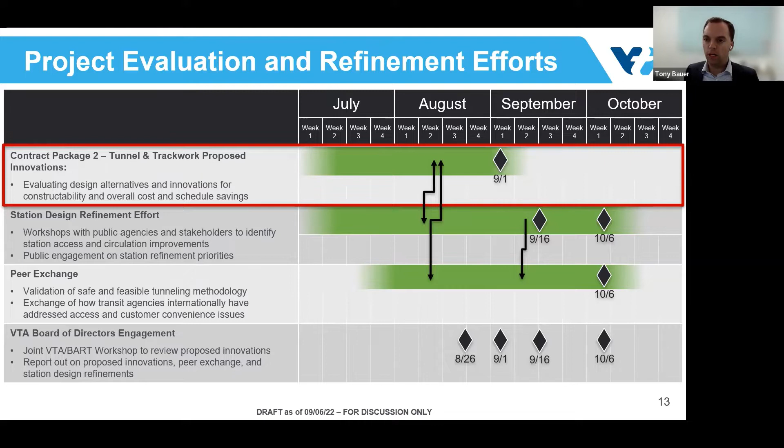We've also been providing input to the 2 parallel activities, the station design refinement effort and that peer exchange. And then on the last line there's just again summarizing the board of directors engagement that we've had over the last couple of weeks, and we will in the coming weeks.

Next slide, please. So as some of you may or may not know, the CP2 contract is being delivered with what we call a progressive design build delivery model. This is a pretty innovative way to deliver a construction transit project, but it involves engaging our contractor early in the process to solicit their input on the design of the overall project.

It's very important to get constructibility, cost, and schedule feedback from a contractor who's going to build the job early in the process to make a better project. One of the ways to do that, to get that early engagement, is through a progressive design build model.

That model starts by defining high-level requirements for the project and overall goals, and then allowing the contractor to come up with the design collaboratively with VTA, BART, and our stakeholders that will meet those project goals and requirements. As expected, when we collected proposals in December of last year from our 2 bidders...

Each of those proposals contained a number of really great ideas that we wanted to work with the contractor to further evaluate, and some have pretty significant impacts on the overall configuration of the project. As part of that board award that the board of directors authorized us in May, they directed us to study over the next 90 days these innovations that were included in the proposal jointly with the KST team.

That has led to the proposed innovation, which is the contractor proposing that we can actually increase the size of the tunnel by about 5 feet — a slight increase in the diameter of the tunnel.

But what that would allow us to do is locate the trains side by side completely from end to end of the underground alignment. So it would be consistent from the east portal all the way to the west portal, where the trains are relatively at this same location. And that would allow us at the underground stations to put a center platform in between the two trainways.

This standardization of the tunnel cross section allows us to more systematically construct the structures inside the tunnel, and we're actually able to build some of these structures as we're constructing the tunnel. So the tunnel is being bored ahead of us, and then several thousand feet behind where the tunnel is being constructed, the internal structures are being constructed. That allows us significant time savings and associated cost savings with that approach.

As you can also see, the center platform at these stations can be accessed from a mezzanine level, which you can sort of see towards the back of the rendering there. Passengers would come into this mezzanine level, which would be above the platform, and would come down stairs or elevators to the platform level.

It also gives us a lot of flexibility in how we can arrange the station entrance locations, and Peter's going to talk a little bit more about this. The mezzanine is very flexible, and where those station entrances are located is a lot more flexible than the previous design.

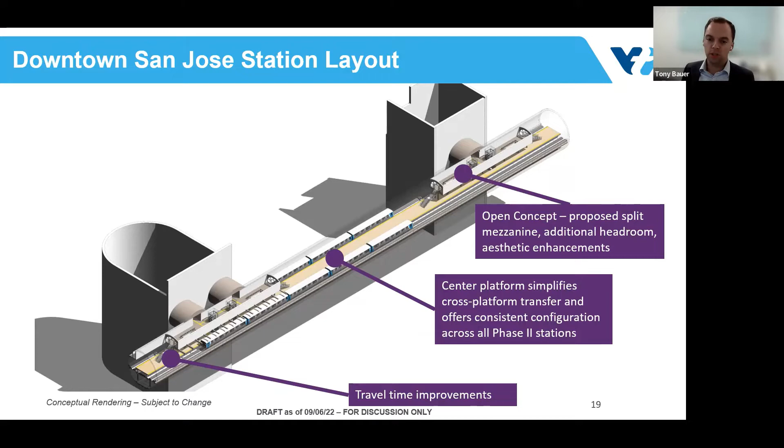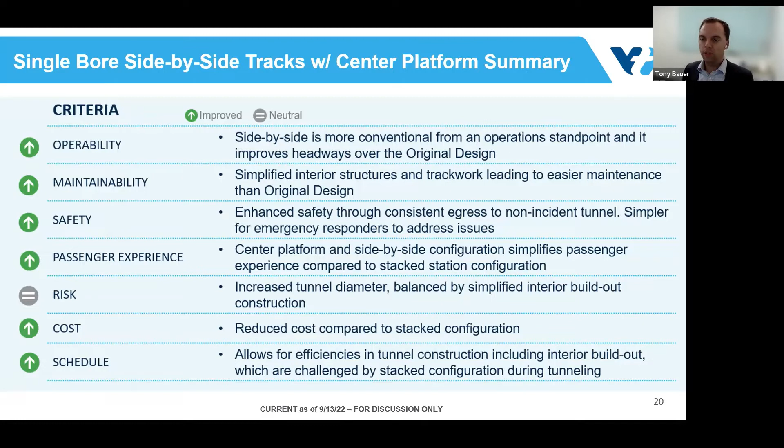I won't go through all of these, but we talked about the criteria we evaluated these innovations against, and here they're repeated. We see big improvements in all of those criteria: operability, safety, maintainability, and the cost and schedule benefits that we talked about earlier.

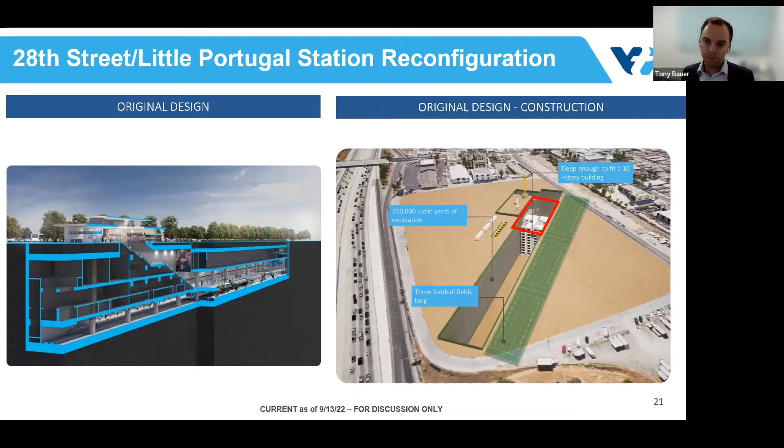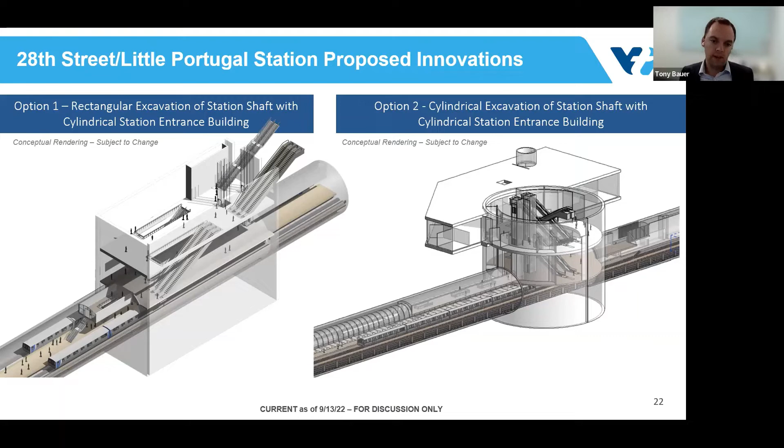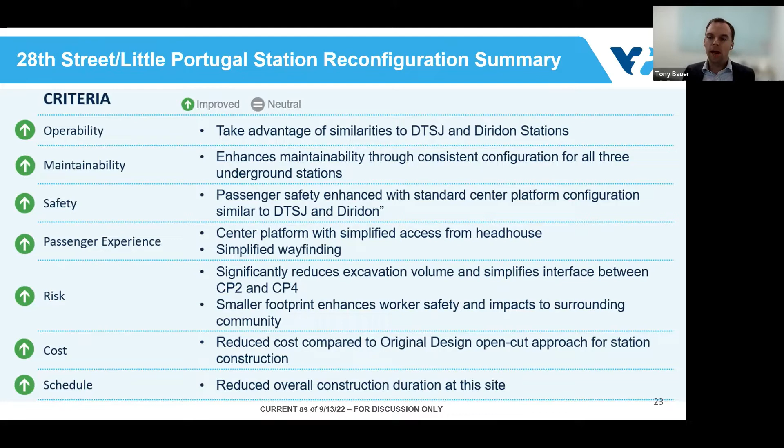Back to the criteria again, we see massive improvements in this innovation compared to the original design. Operability is improved, along with safety, maintainability, and significant improvements in construction impacts to the surrounding area because of the smaller excavation, plus improvements in cost and schedule.

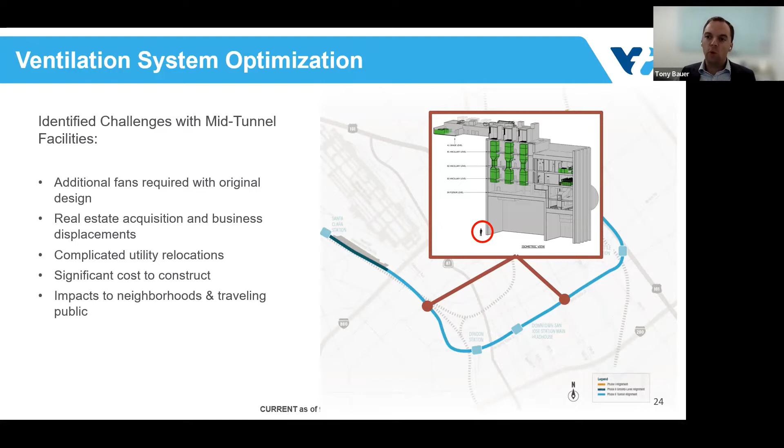If we can jump to the next slide, we can see visually what that looks like.

In the event of a fire, say a train fire, smoke would rise up to the top of the tunnel and then be pulled into these EVS stacks, as we're calling them. Essentially you can think of them as chimneys which go from the top of the tunnel to the bottom. The smoke would be pulled into those EVS stacks and then downwards into the bottom of the tunnel, where it would be taken to the nearest emergency ventilation shaft.

Because of the standardization of the cross-section from end to end, we have this continuous duct from end to end. This allows us a lot more flexibility in where we can locate the emergency ventilation equipment.

What's proposed in the innovation is, how can we look at moving the emergency ventilation equipment that was at these mid-tunnel facilities elsewhere, like at the station locations, which would allow us to eliminate the need for the mid-tunnel facilities in their entirety. We think we've come up with a solution for moving all of that equipment, and we feel we can avoid having to build these facilities, which will have cost benefits by not having to construct them.

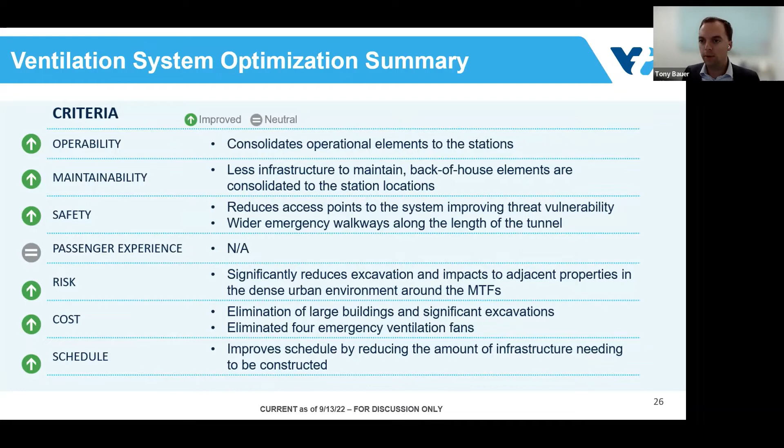In terms of timing, we have a busy couple of years ahead of us. We're moving into the final design phase of our project, and we're delivering the project in two phases. Phase one, or stage one, is essentially the final design phase, and stage two will be the heavy construction work. We are anticipating starting heavy construction in mid-2024 or so.

In between now and then, we have a lot of work to do in terms of design and getting approvals for the project. In order to meet our overall program schedule, we need to start certain construction activities earlier than the stage 2 date, where we'll kick off most of the construction.

These are for long lead items. One example is purchasing the tunnel boring machine, a large piece of construction equipment with a long lead time. It'll take between 18 and 24 months for the vendor to manufacture the machine, assemble it, test it, disassemble it, ship it to our site, and then reassemble it for testing. So we need to start that process early.

We are planning to go back to the VTA Board of Directors at the end of this year or early next year to ask for authorization to purchase the tunnel boring machine and some other early works. We also anticipate going back to the Board for other enabling works contracts, such as utility relocation, some building demolition, and other enabling works towards the end of 2023. So we'll have some construction activities happening in 23 and 24, with heavy construction starting in mid-24.

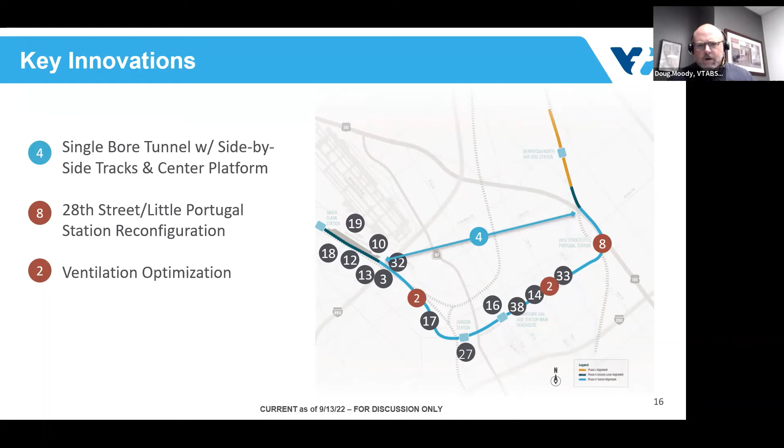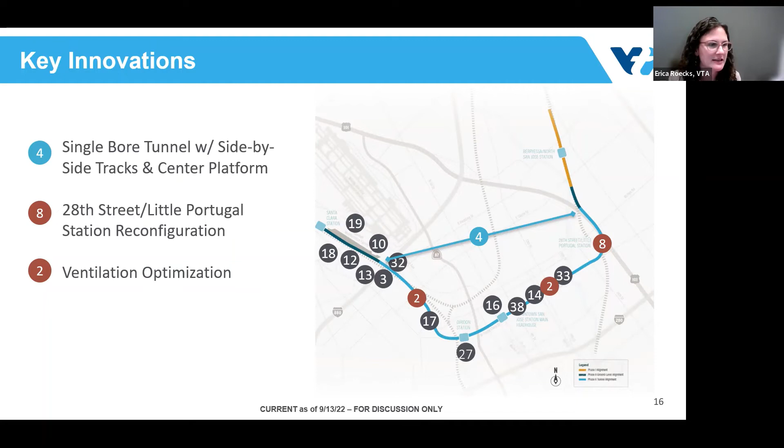Eric, I saw you come on camera. I was just going to mention that these are the proposed innovations, so they're not all guaranteed to happen yet. So while some of them may happen adjacent to their neighborhood, Jonathan, I just want to make sure that as you share with them, it's not that these are fully done and baked, that they're still proposed at this time. There's a process to go through, but it'll go through the EIR process and all that.

If they have effects. I had two other questions for just this section. What's the advantage of this wider tunnel now that we have side by side versus the original twin bore design, which gave a similar side by side configuration?

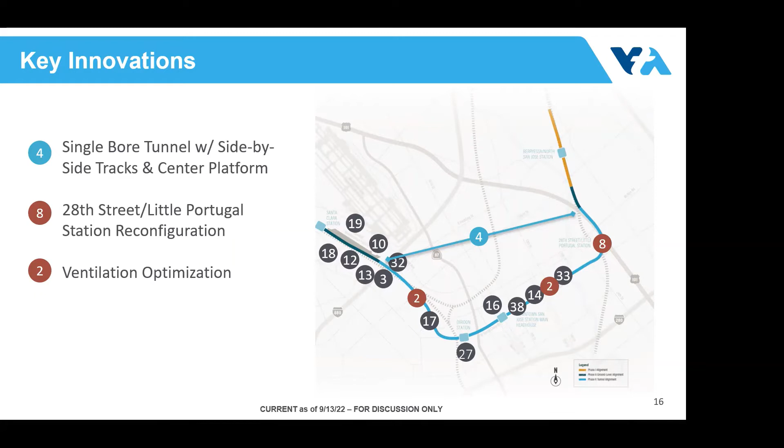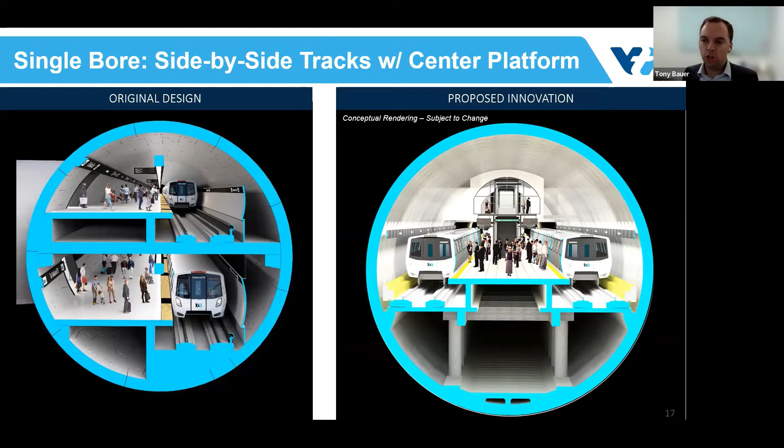So there are a number of benefits. The single bore benefit is still there compared to twin bore in terms of the amount of street disruption and utility relocations that would be required for twin bore. Also, if we could jump to the slide with the emergency ventilation concept.

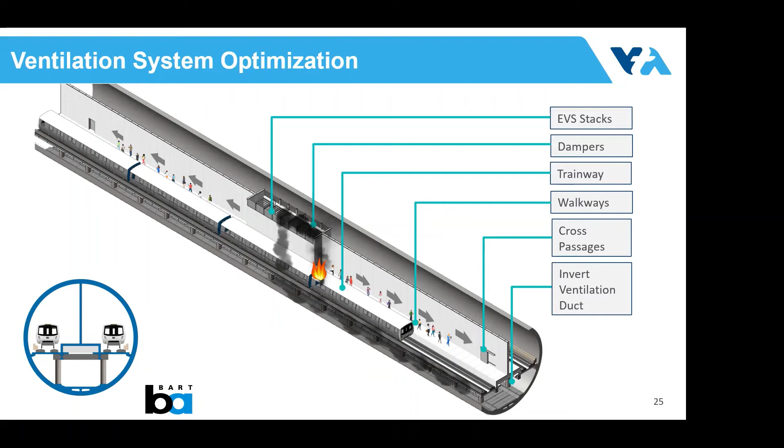Okay, thanks, appreciate the answers. Yep, thank you. Cool, thank you. And in the interest of time and being respectful to Tony, thank you for such a great presentation, Tony, and your responses to questions. Always nice to have you here.

We're going to move over to Peter to talk about the station refinement process for downtown and Diridon stations. Peter, you're up. Thank you, Doug. My name is Peter Sokoloff. I'm one of the architects working on the BSV team on the design of the stations, both for CP4, which is the three stations that are part of the tunneling, as well as Santa Clara. Today we wanted to give you an update on the station refinement process we're currently undergoing for both downtown and Diridon stations. If you go to the next slide.

As part of the awarding of the CP2 contract, the VTA board asked us to engage in a station refinement process to achieve goals A, B, C at the bottom of the page: improving connectivity for riders, especially intermodal connections at Diridon. At downtown, enhancing pedestrian safety by looking at potential alternative entrance locations, as well as improving circulation within the station. And at both stations, improving transit-oriented development opportunities. If you go to the next slide.

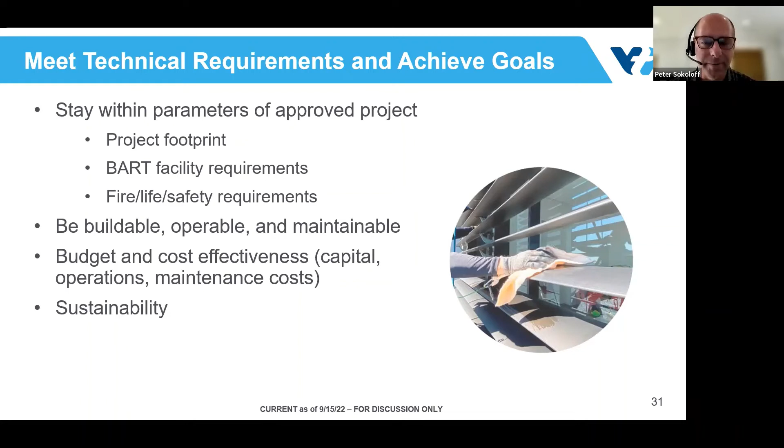Some of the technical requirements we're trying to maintain as we consider these other options are similar to the design review committee process we went through about the station look and feel. These are more about the goals I described earlier, but the parameters remain the same: staying within the project footprint, meeting all of BART's requirements, being buildable, operable, maintainable, meeting the sustainability goals of the project, and of course cost and schedule impacts as well.

Some of the things we've been looking at - we're not going to go into that much detail today, but stay tuned as we develop some of these concepts. You will have a chance to look and see the ones we think are worth moving forward with.

With the downtown and Diridon stations, one of the key things we're looking at is shifting from the current circular deep shafts that bring people down to the tunnel, to more rectangular shaped shafts. This could improve opportunities for transit-oriented development or improve vertical circulation, reducing the number of switchback escalators, for example, at downtown.

At both stations we're looking at second entrance locations. At Diridon, a second entrance would focus on improving integration with the future DISC intermodal station concourse and providing more direct access. It's also about meeting one of the city's priorities of providing an entrance on the south side of Santa Clara Street. Those are the key refinements we've been exploring.

I think that's it. We're at a stage where we have options, we're developing them, and we will evaluate them based on the criteria I described. I'm also happy to answer questions on that process and where we are with it.

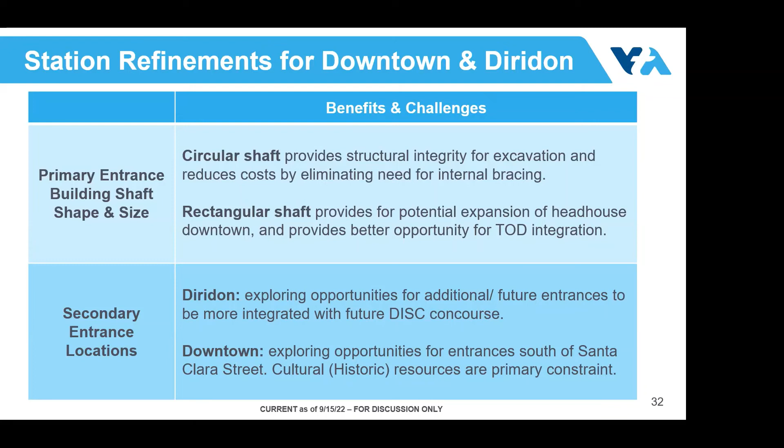I think we should, because there's going to be, at the board meeting that Erica just shared the link to, some information on this in the CWG for downtown Diridon that we will post, and I think this is the topic this group is interested in. So we can come back if there are questions on what Peter just presented; we can tackle that later. But Erica, you're up. Great, thank you.

Next slide. As we mentioned in the July CWG meeting, the team has been exploring station refinements to enhance the passenger experience from the west side of the rail corridor for the Santa Clara station. Today we're going to dive a little more into the details with some graphics.

We're exploring a potential west side underground concourse that would be in addition to the current design, which is the elevated concourse over the storage tracks. There will be direct access from the east end of the pedestrian undercrossing to this new west side partial underground concourse. We're including this design concept as an optional bid item in the CP3 RFP, as it's at a much lower level of design than the rest of the station. Let's dive into it. Next slide, please.

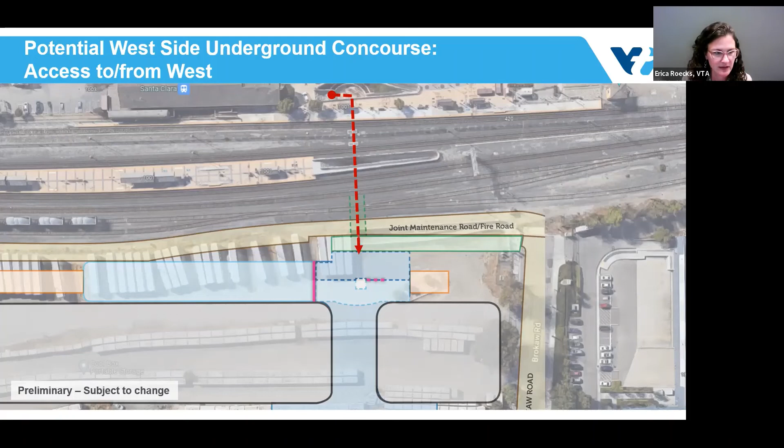I'll walk through the features on the following slide, but first wanted to orient you with this aerial view, showing the path of travel from the west side of the rail corridor with the red dashed line, traveling through the pedestrian undercrossing to the station entrance. On the next slide, we'll dive into the details.

This is the plan view, and on the following slide I'll walk through the cross section. To orient you, Brokaw Road is on the right side of the page, the Gateway Crossings development is at the bottom, and the existing rail corridor is along the top. The green dashed area is the pedestrian undercrossing, and the horizontal green area is the ramp up to Brokaw Road.

To access the underground concourse, passengers would enter at the red arrow on the west side of the station at the top of the screen. They would then continue through the fare gates, shown in the dashed pink area, and everything dashed on this graphic is underground. Then to the paid concourse, shown in light blue, where they would travel up to the ground level platform, which is orange and partially obscured by the elevated paid concourse area, extending that entire length.

Also, just a reminder that this will be in addition to the current design with the elevated concourse. So patrons coming from the west will still have the option to take the elevators or stairs from the red arrow at the top of the page to the elevated concourse, where they'd pass through the fare gates in the solid pink line to the paid concourse and then travel down to the ground level station.

And coming from the east, you would access from the red arrow on the bottom of the page to the east side of the station and traverse through the unpaid elevated concourse in dark blue to the fare gates and then down to the ground level platform.

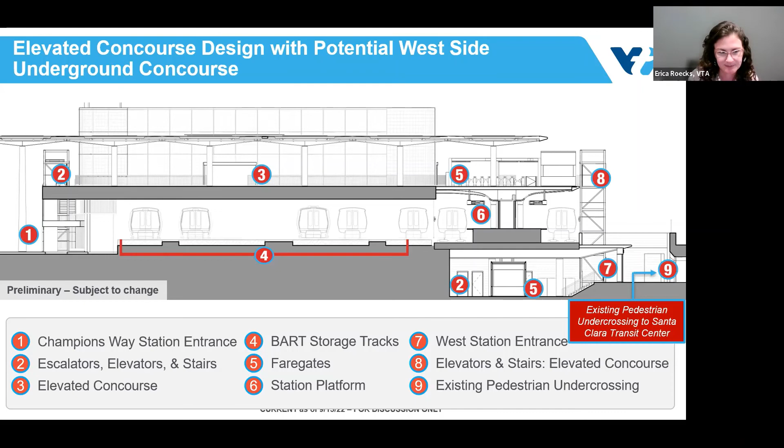And then the next slide is another view. This is the conceptual view coming out of the tunnel. I'm sure you're all familiar with the shape of the tunnel with the arch on top. Looking at this new potential concourse, the west side underground concourse, from the tunnel.

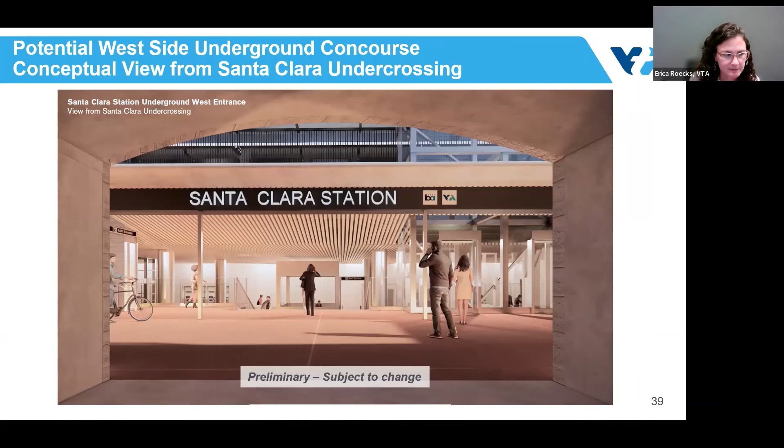So as I mentioned, the team is exploring this option, and there are many considerations and constraints we have to take into account. This partial underground concourse requires a second set of fare gates and a station agent booth, which would be occupied per BART requirements, both of which have long-term maintenance and operations costs associated with them. In addition, a ventilation system is required, and additional structural framing is needed to support the overhead rail structures.

And due to the high water table in the area, extensive engineering is required to excavate and construct the underground station structure foundation. So we are including this option, this potential west side underground concourse, in the CP3 RFP as an optional bid item.

Inclusion of this optional bid into the design may require VTA board direction and approval. As we continue to advance this, we will keep you updated on the progress here at the CWG meetings as we continue to evaluate and work through the considerations and constraints. And with that, I'd be happy to answer any questions you have related to this option, which is in addition to the design you've seen previously.

Here's Kevin. Kevin, you're up. Yes, thank you. When you talk about an optional bid item, what does it actually mean?

It means that we have a plan without the West Side Underground Concourse, and you could optionally say we would like to build the West Side Underground Concourse. Meaning, like, I guess, what does optional bid item... what are the implications of that?

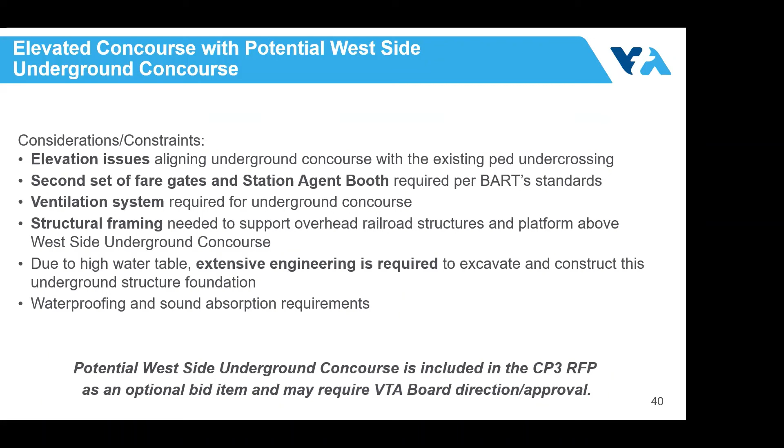And how it fits in? I saw the two renders, but the map was a little hard. Yeah, Marissa, if you can go back to slide 36.

Then you can see the platform extends from, it's the orange box, the rectangle on the right side of the screen, extends down to where it touches a gray box at the left side of the screen, which is a BART supervisor booth. So that's the extent of the platform, and it's toward the north end of the platform is where.

Okay, so if I'm looking at this and understanding the underground part, that light blue is the underground part that's paid, and the dark blue is part. The dash part is all underground. Okay, so that's the middle, and then those little light blue in the center there, and then there's the... okay. Yes, so it kind of just pops up. Okay, cool, just trying to understand it. Yeah, for sure.

Thank you, Kevin. Thank you, Erica. Anna: Hi guys, I'm interested in this option on this design. So you say it's VTA's decision. If VTA says we just don't have the budget for it, but it's actually in the long term better for the community, or the community wants this, what are the options for the community to advocate for it? Can we change their mind if they say no to the optional design? What are our opportunities there?

I think at this time we're still trying to figure out the process moving forward, but we will definitely keep you updated on how it advances and when you can advocate. We've heard loud and clear from the community that they're interested in something along this line, that you'd like improved passenger experience. So it's good to hear from several of you today that you're on board and like this design that we're advancing. I don't know that we know the exact details yet.

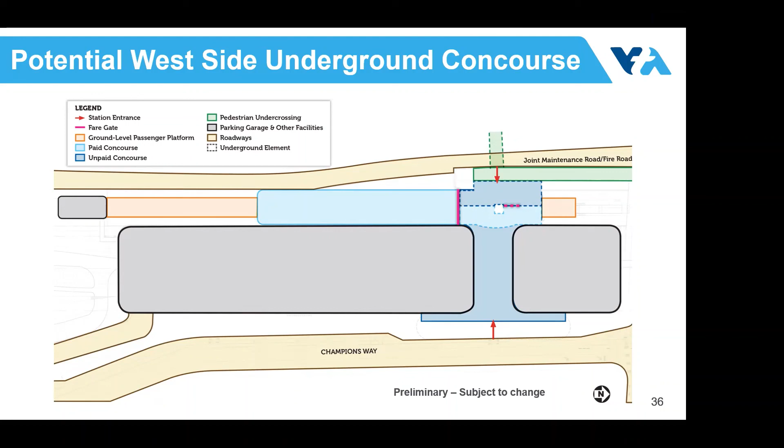Great, thanks. Cool. There's a hand up. Patricia, I think that's a high five. So if you want to say something, please - I'm coming off mic. Clapping. Okay, that's good, looks good to hear.

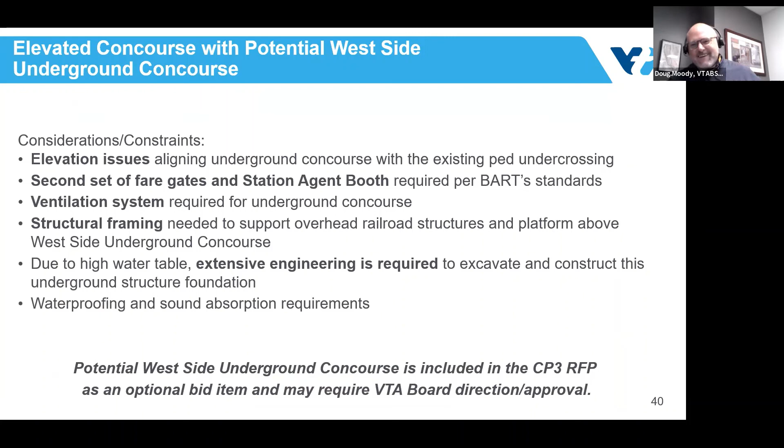You know, this is your time. But from a project perspective, we'd really like to hear from you. If not today, at upcoming CWG meetings, how have you been sharing information about the project with your communities, and what you've heard? That's practice is a lot more important as we move closer to construction. So if you have answers right now, we'd love to hear, or if there are other things you'd like to say to the group or questions for the team on material presented earlier today, this is your time. If you'd like to say something, please raise your hand and I will call on you.